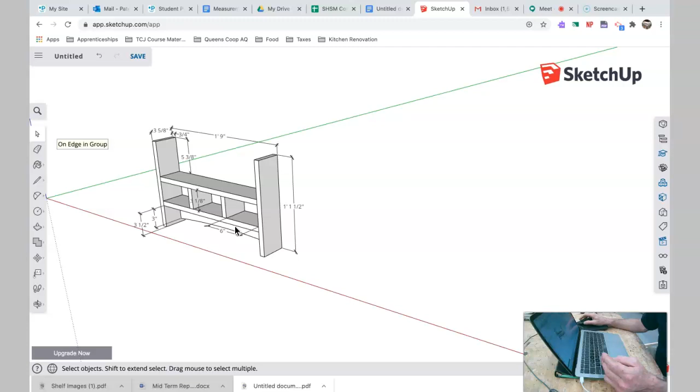Okay, everyone. If you're watching this video, that means you've already done a couple of the basic things in SketchUp, and you know how to use some basic tools. The purpose of this video is to show you how to draw your project.

So here's my project. Just a very simple shelf, space for hooks down there, place for little cubbies for things, and a bookshelf up top. And I have dimensions. So this is a version of the project, but this is what you're going to hand in.

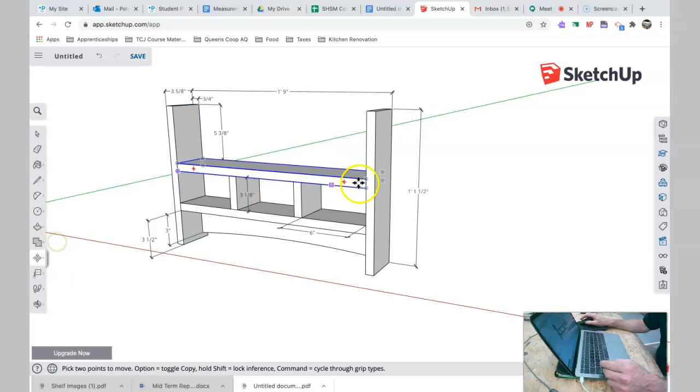You're going to take a screenshot of it in its final form like this, but you're also going to take a screenshot of it with everything pulled apart, where you take the pieces and pull them apart. You can get rid of the dimensions when you do that, to show that you've grouped everything properly.

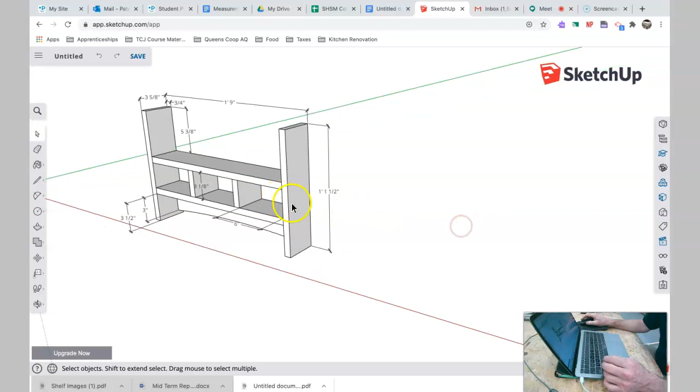Okay, so I'm going to copy this off to the right, draw it over in this space here, using some of the techniques I've shown you. The first thing is I'm going to draw these two sides here. Now let's zoom in and have a look at the dimensions.

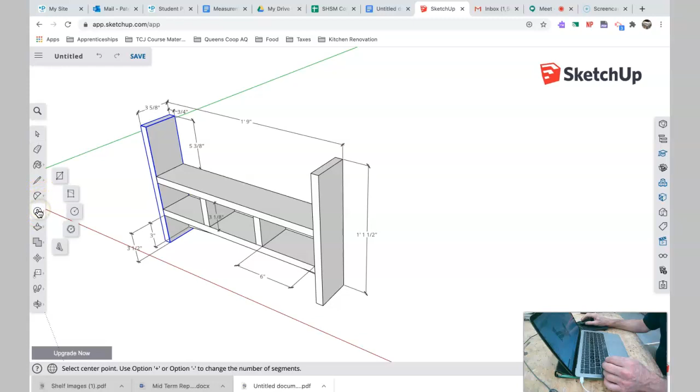So this piece here is 3 5/8 wide and 3/4 thick. I'm going to draw just that two-dimensional shape, 3 5/8 by 3/4, by going over here and choosing a square or rectangle tool, and I'm going to draw that.

So here's how you draw it. You click once to begin the drawing, drag it out, and then don't click again. You're going to look in the lower right of the screen. See all these numbers down here? Watch those numbers, because I'm going to do some typing now.

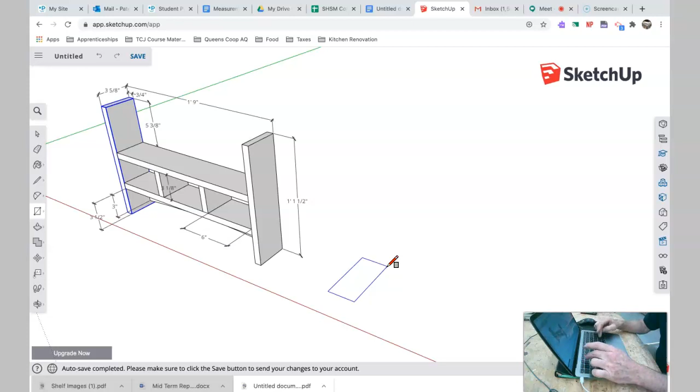So it's 3 5/8 by 3/4. I'm going to type 3/4, and put a comma, and then I'm going to put 3 5/8 — so 3, then a space, then 5/8, okay?

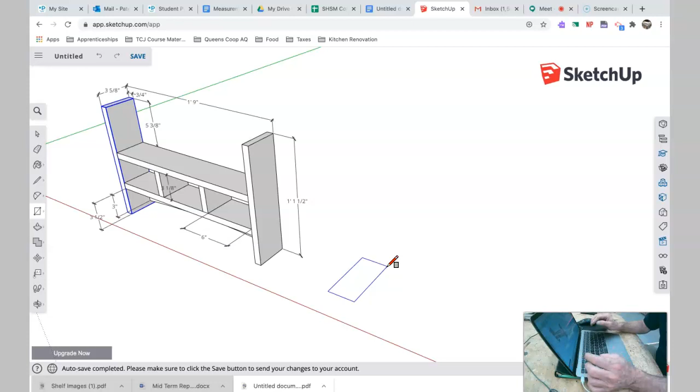Now SketchUp knows that I'm talking about inches. If I don't indicate anything, if I don't put the foot symbol or anything, it knows I mean inches. So you see what I just did? 3/4, comma, 3, space, 5/8. I hit enter, and there it is. That's the shape of that.

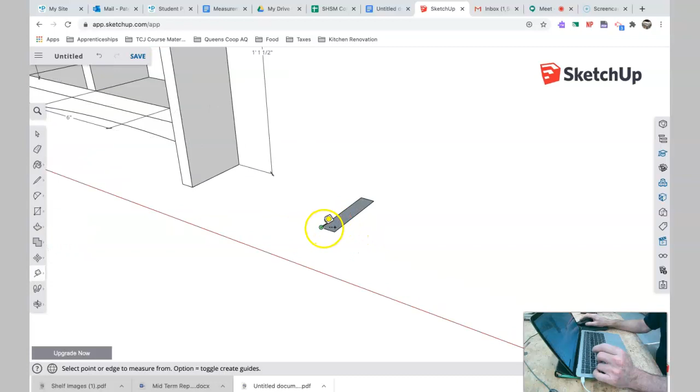And if I want to check that, I can get my tape measure — you can always use your tape measure to measure anything. Click once, then go to the end. That's 3 5/8. Hit the escape key. You can use escape to get out of any function or anything you're doing.

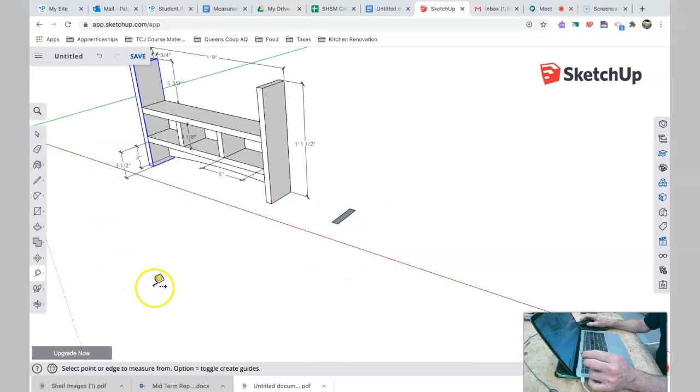And that's 3/4. So I hit escape, and now I'm going to raise that up. How high is this project? These pieces are 1 foot 1.5, which is the same thing as 13.5. So I'm going to push-pull.

Here's the push-pull tool — you see what I just grabbed it over there? Grab the push-pull tool, I click once, and I raise it up. Now again, don't click a second time. What you're going to do is type the dimensions in.

So 13.5 — 13, and I could put a fraction, a space, then 1/2 like that. Are you watching the numbers in the lower right of the screen? I could put 13 1/2, but instead I'm just going to work in decimals, since you can do either 0.5. Hit enter, and now that piece is 13.5.

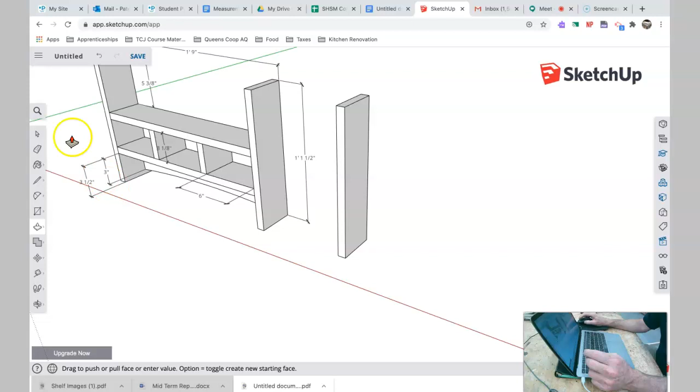So I'm done drawing that side piece — nothing else to do to it. If you want to put curves in it you could do that at this point, but I'm done. So I'm going to take the pointer and triple click — 1, 2, 3. Notice what that does: it selects everything on that object. Triple click, then I right click and make it a group.

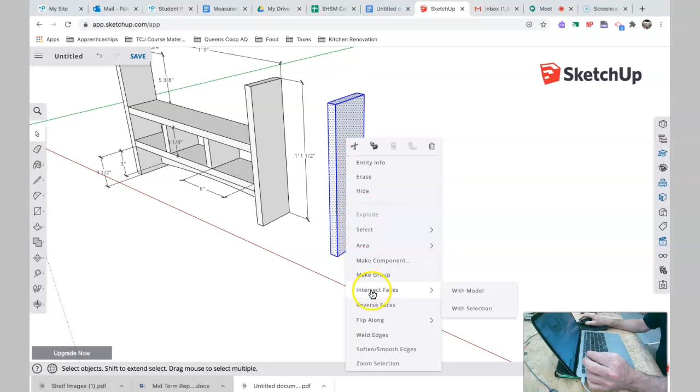Okay, so triple click, make it, and then right click, make it a group. Now I want to draw the second side. This is the first side, I'm going to do the second side. Now, how do I do that? I could come over here and draw it, but I've already got one here.

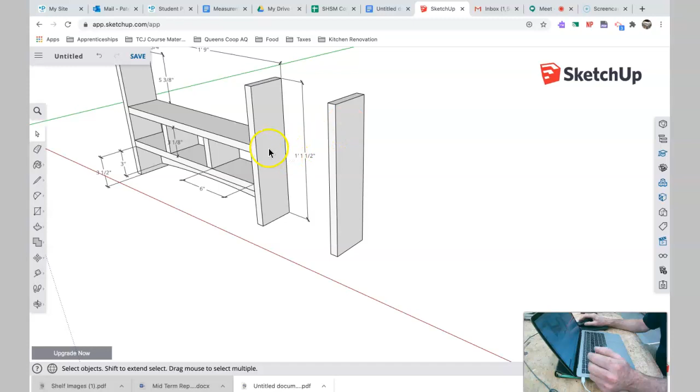It's identical, so I'm just going to copy this one over. We need to know how far, so I'm going to scroll in here. It's 1 foot 9, okay, 1 foot 9, which is 21 inches. And that's from the outside of the shelf to outside, from the outside of the left side to the outside of the right side.

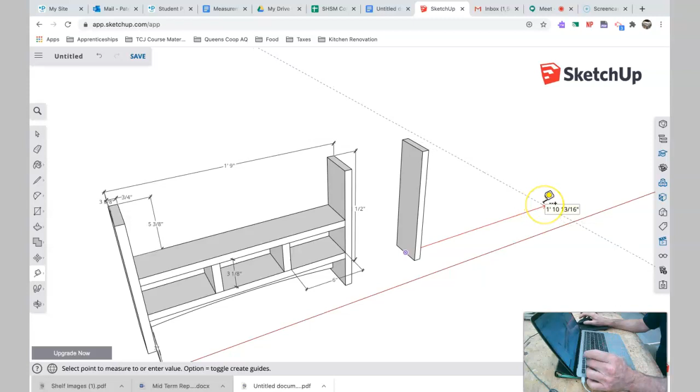So I'm going to mark that off first, the 21 inches, by taking a tape measure. Get the tape measure tool down here, okay, so here's the outside. I'm going to click once and start dragging, but don't click a second time, okay? You type in, watch the lower right of the screen where the numbers are. I type in 21, and SketchUp knows it's inches, and then I hit return or enter. Okay, now that's how far it's going to go.

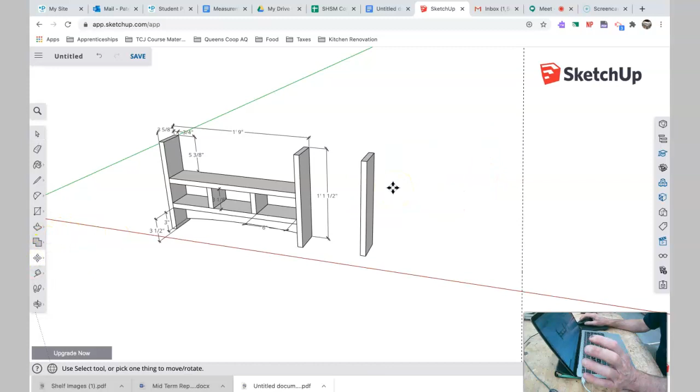Now I have to copy it. So it's a group, so because it's a group, I can take it and move it anywhere. I'm going to hit the escape key there. Okay, but I want to move and copy it at the same time. So I'm going to take the move tool, okay, and go down here.

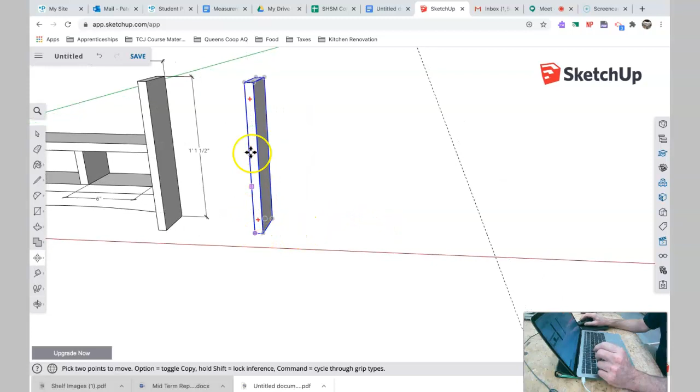Now, where am I going to grab it? That's the big question. It's important whenever you move something, or move and copy, you have to grab it in the right place. Okay, if I just grab it anywhere, like this, and then start moving it, and on a Mac I hit the Option key to copy it. If you're on a PC, you hit the Control key. So I'm going to hit the Option key now.

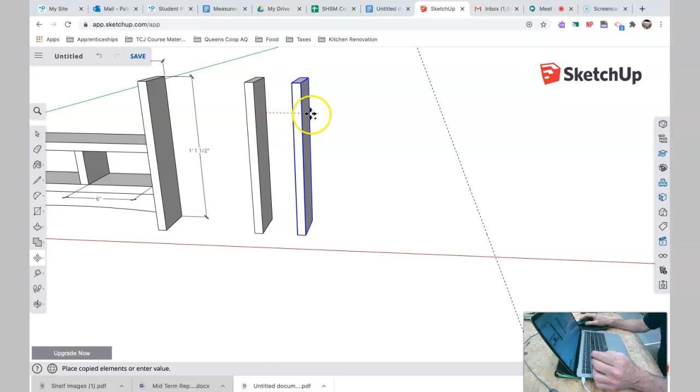Watch what happens. Option. Oh, there we go, it copied. Okay, if you're on a PC, you don't have an Option key, so you hit Control. I don't know if you have an Option key, to be honest, but you hit Control. Okay, and that's it. But here's my point: if I'm just grabbing it anywhere and moving and copying it, it's hard to place it on that line. Okay, see the dotted line? It's really hard to do that.

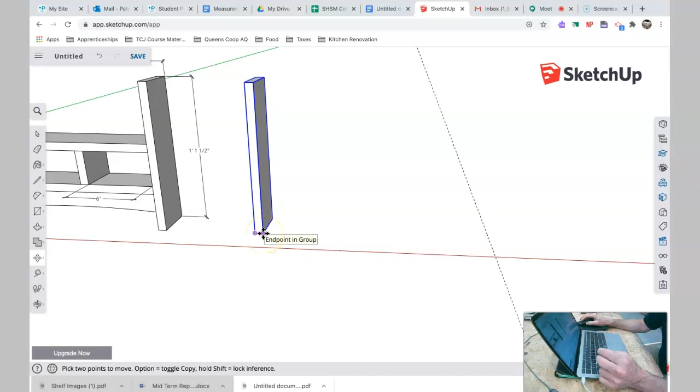So I'm going to hit the Escape key. All right, now I'm back to where I started. Here's what I want you to do instead: grab it from the corner, or from wherever makes sense, to land on that line. Okay, so I'm going to grab it in the lower right corner here, right there. I'm going to zoom in here. You see that? I'm going to grab it right there and start to move it.

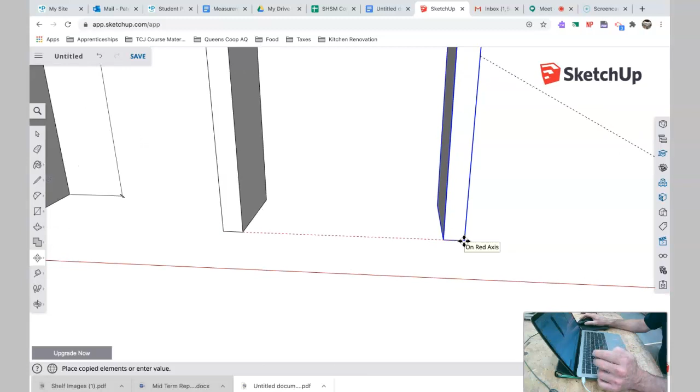And as I move it, as I said before, on a Mac I'm going to hit the Option key. If you're on a PC, then you hit the Control key to copy. So I'm moving it, don't click again. I'm going to hit the Option key. There, okay. And now I'm going to move over here and bring it over here and put it right on that line. Notice I'm following the red axis.

Okay, you see the dotted line is red. If I go off that red axis, it's going to be crooked. So keep on that red axis. Move, move, move, and you see how easy it is to place it on that line now? So that's perfect, and then I click like that, so I click to release. Get my pointer over here.

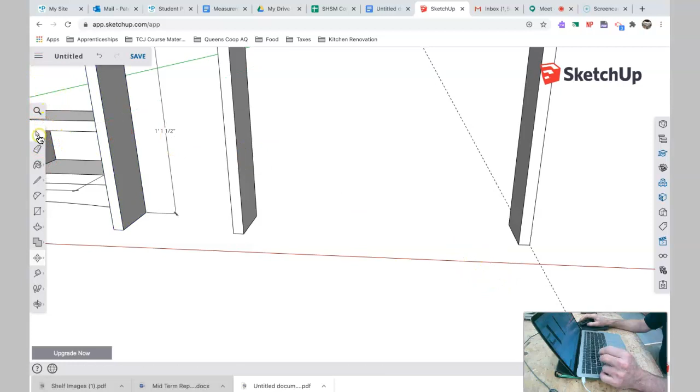Okay, and now what am I going to do? I'm going to do the shelves. So how do I do these shelves? I come down here, let's look at the dimensions. From the top down is 5 3/8. From the bottom up is 3 1/2. Okay, so let's mark those out with a tape measure.

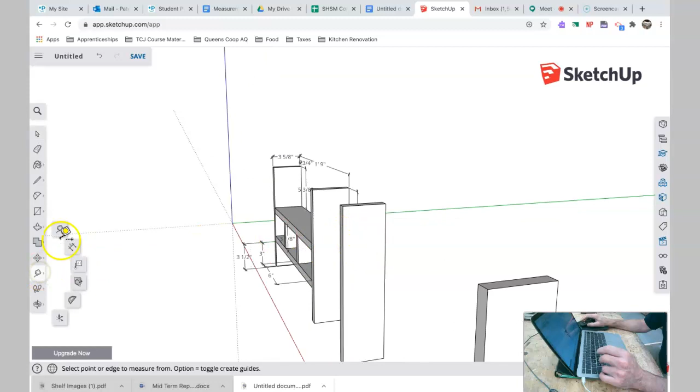I'm going to come in here, grab the tape measure tool, and from the top I'm going to bring it down. So don't click a second time. You're going to do this with the dimensions, so watch the lower right of the screen. I type 5 space 3/8. Okay, enter. And that gives me that line right there.

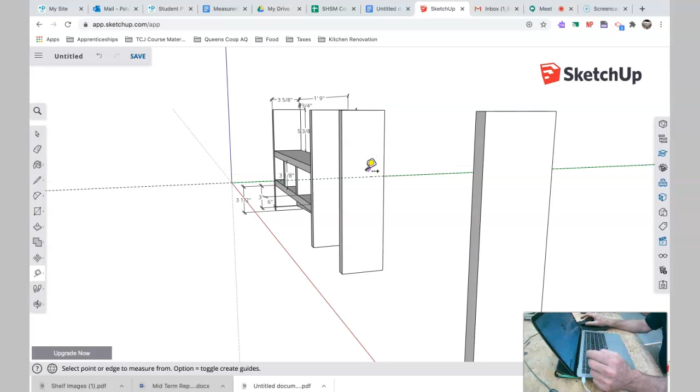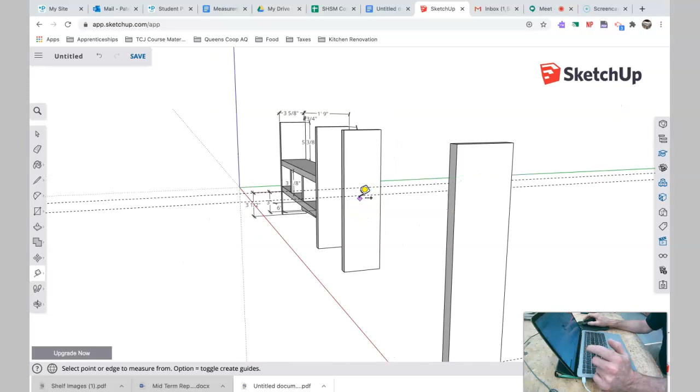Okay, now I need the thickness of this. So this shelf is 3/4 of an inch thick. So I'm going to do a second line here. I start to drag it out, and then I type 3/4, return or enter. And that gives me the size of that shelf. And so now I can do the same thing at the bottom. The bottom one was 3 1/2 inches up.

I'm going to click and climb that up 3.5. I could have typed the fraction, but I decided to do the decimal. Return or enter. That's the bottom of the shelf.

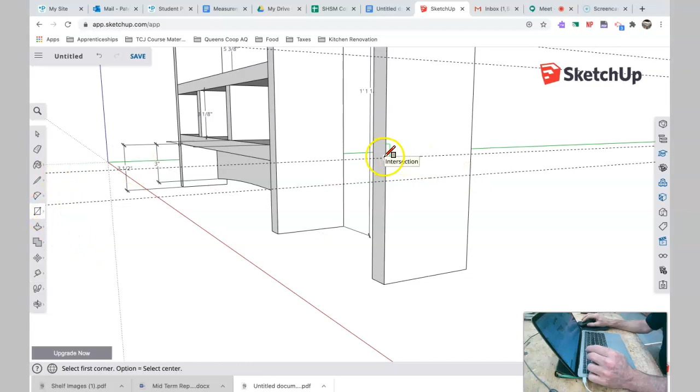Then I'm going to click once, bring it up 3/4, return. Then I'll take the rectangle tool, click once, click twice for that. And here, click once, click twice, and now we grab the push-pull tool like this, and we're going to take both of those over.

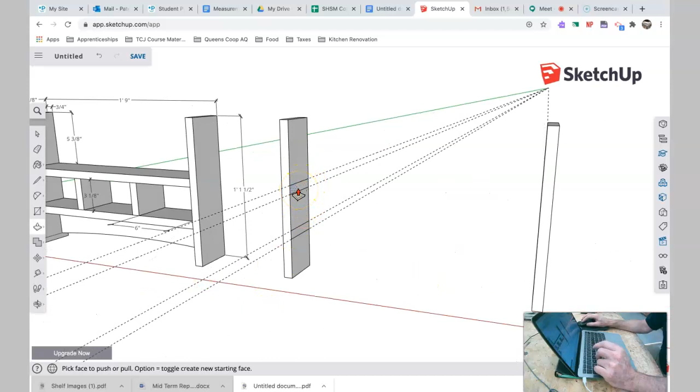So watch this. When you push-pull stuff, you click once and you drag it. All you have to do is line up the cursor with the thing you're trying to align with. I bring this over, and all I really have to do is place it along that edge.

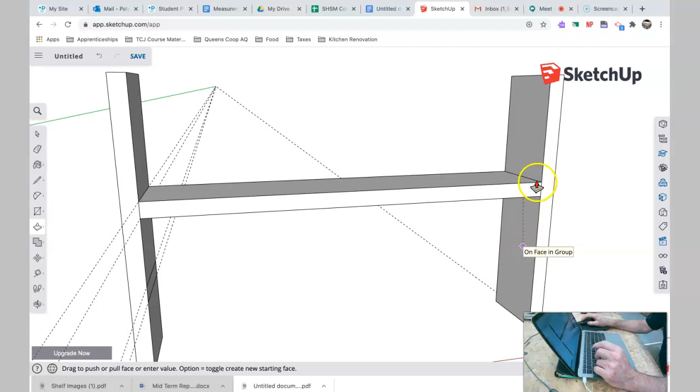I can place it on that face anywhere, or on that edge. But don't pull it all the way through - that's wrong. Just go on the edge or the face like that, then click a second time.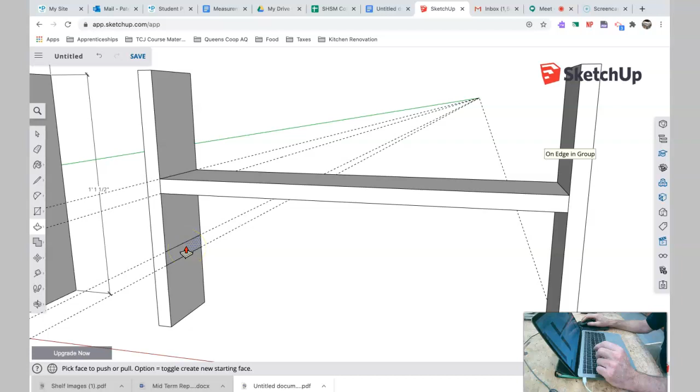To do this second one, it's the exact same size. To be honest, I could have drawn one and then copied it down, but watch this - I want to stretch this out. This is the exact same as the last one.

So I'm just going to bring it over and place it on that face, just like that. Or I touched the edge, but anyway, so those two are done.

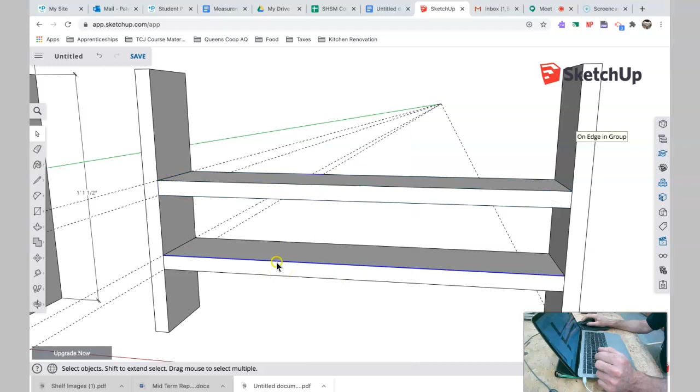So now I can group them. Create a group - 1, 2, 3, just a triple click, and then right click, make a group. Same thing here - 1, 2, 3, make a group.

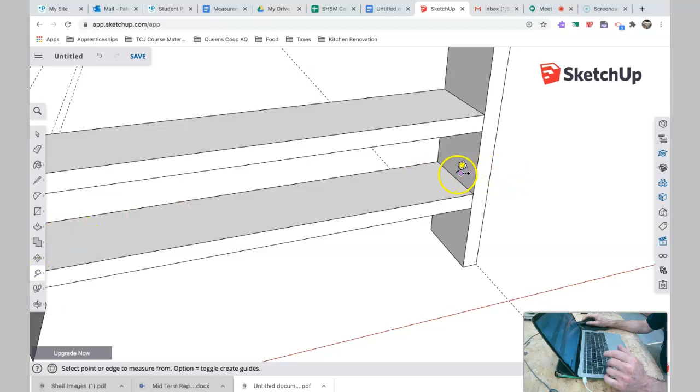Now these dividers - those are 6 inches in. So I'm going to come in here and create with my tape measure tool. I'm going to come over 6 inches. I type 6, enter, like that.

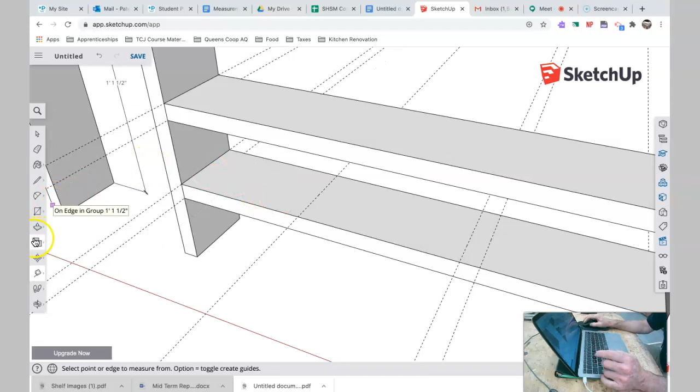And it's 3/4 thick, so 3/4, enter, like that. And over here, all I really need is the 6 inches, and I'll show you why. So 6, return. And now I'm going to create a rectangle here, like this.

I'm going to pull it up, like that. I just have to go to that edge - that's all I have to do. And then I'm going to make it a group. To make this a group, triple click 1, 2, 3, right click, make a group.

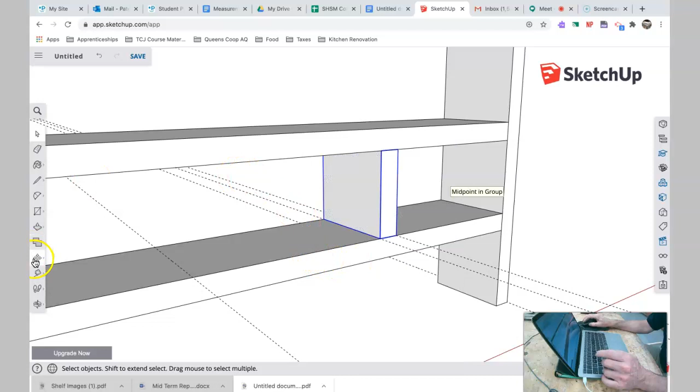And now I'm going to move and copy this at the same time. So I grab it there, and I start to move it. As I move it, because I'm on a Mac, I hit the Option key. Option copies it - if you're on a PC, you hit the Control key. I bring this over and place it right on that line, like that. That creates my 3 cubbies.

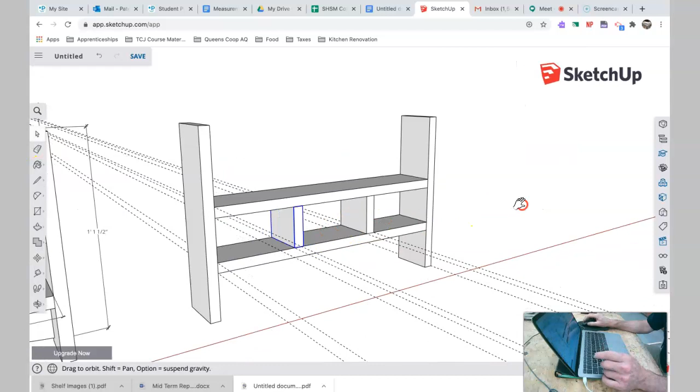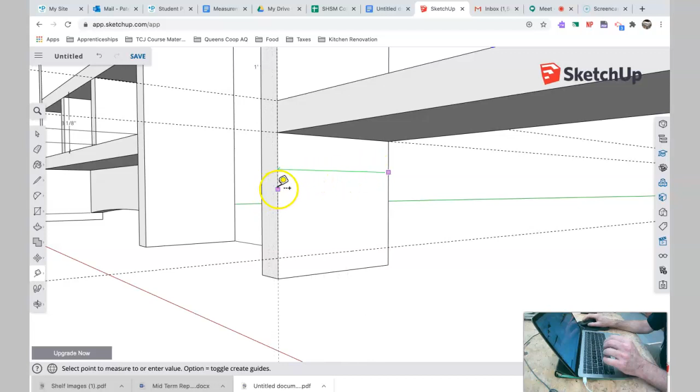Now all I have to do is go underneath here and create this back piece with a curve. I'm going to crawl underneath here, use the tape measure tool. I think it's a half inch up from the bottom, so I'm going to come up a half inch, and it's 3/4 thick. So I'm going to come over here 3/4 of an inch.

There we go, 3/4, like that. Rectangle tool, okay, like that, and then I pull that across. So I'm just going to zoom out here. I'm going to rotate around.

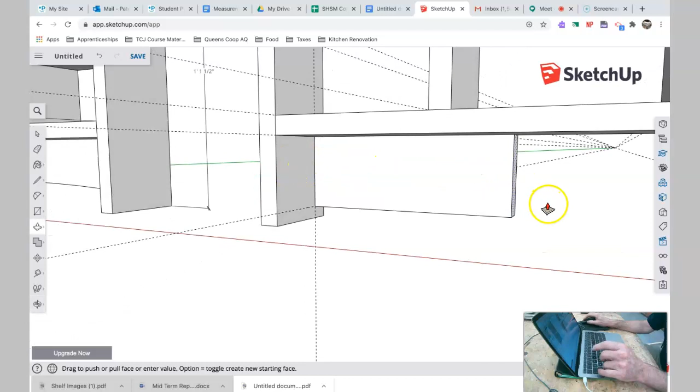So I'm going to start pulling, and I'm going to rotate as I pull - you can do that. Bring this over, place it on the face, like that. So that's where it's going to go. And click, and I'm done.

And now I just need a curve. Curves are kind of cool, they're fun to work with. So to draw a curve here, let me back out. Let's get rid of some of these lines - they're starting to confuse me. So I'm going to get rid of these lines. How am I going to do that?

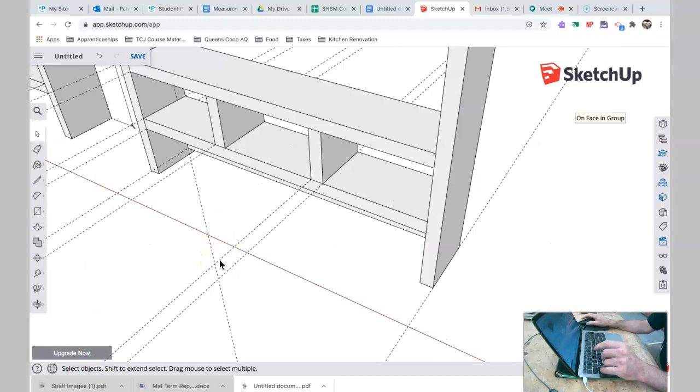I'm going to start in the lower right and draw a box like that, and then delete. That's a quick way of highlighting anything on your drawing. If you want to highlight a whole bunch of things all at once, you start in the lower right and draw a box around whatever you want to highlight, like that. So that's the whole thing, and I could move that whole thing if I wanted.

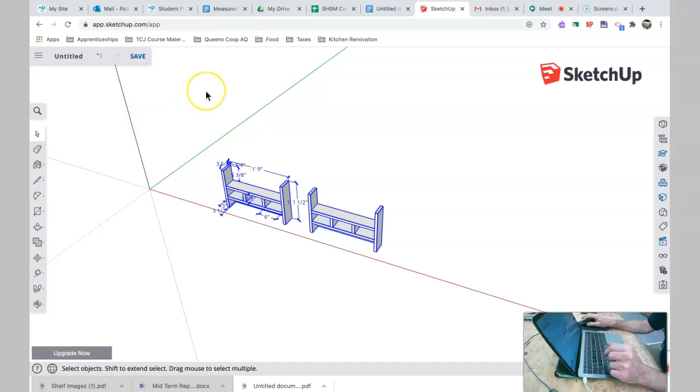Whatever, I'm going to hit the Escape key to get out of this. Go back here, get the pointer, click anywhere on the drawing, and that gets rid of my highlights.

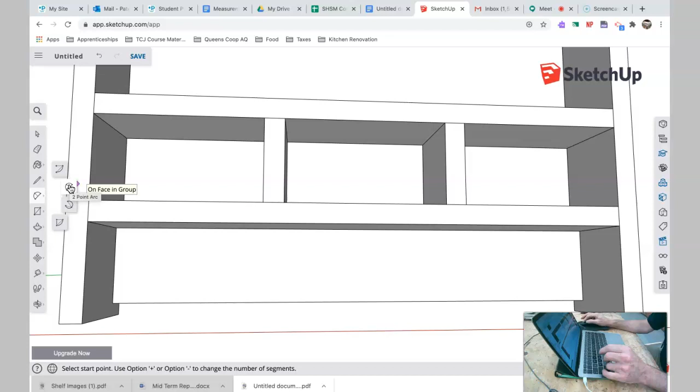Okay, let's crawl underneath here and draw a curve. The curve tool I'm going to use is up here, called a 2-point arc. I click on that tool, now I can draw an arc. I'll start down here, click once, bring it down here, click twice, and then raise it up. I don't like too much of a curve, or that kind of curve either. I just like a very gentle, shallow curve like that. Click.

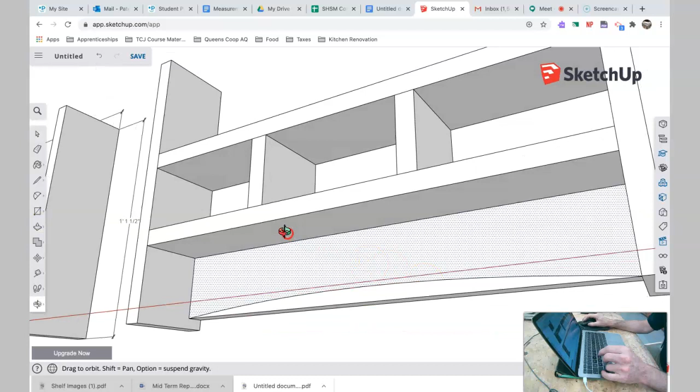Okay, now push pull. I click once, push it through, click twice, and I'm done. So that's my project, a copy of the first one.

Now what you do is put dimensions on it. Dimensions are down here by the tape measure, that's the dimensioning tool right there, and you just start dimensioning your project like that.

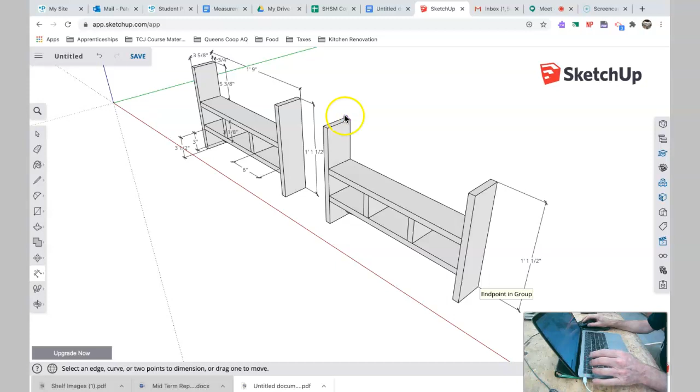Drag it out, and remember the dimensions for this. You have to include all dimensions needed to build this, all necessary dimensions to build it. So you just go around your drawing like that, and it ends up looking like this. You see all the dimensions, those are all the dimensions necessary to build the project, I hope.

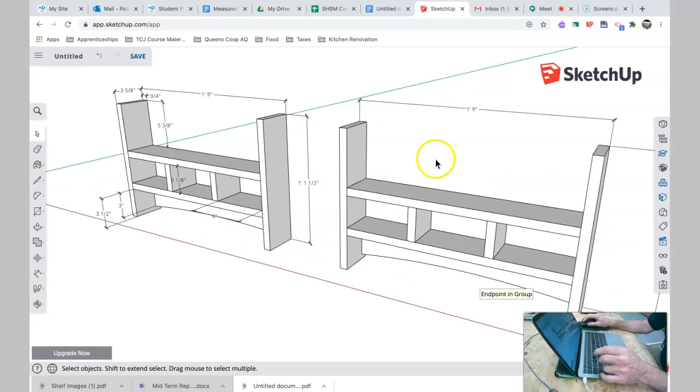So that you could hand this plan to somebody who does this for a living, or to somebody to build, and they shouldn't have too many questions because you've given them all the information.

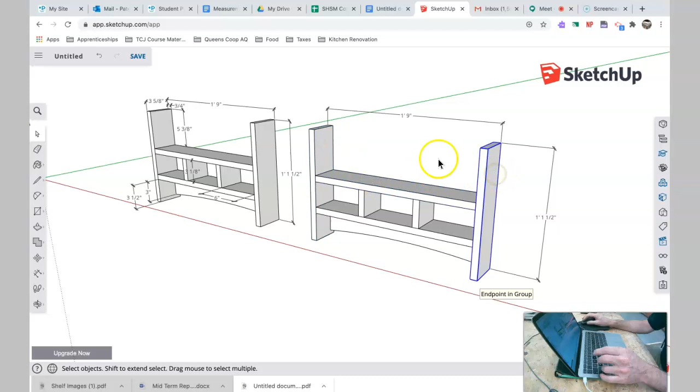And if you notice, basically if I click on any of these parts, I know it's grouped, because if I click once on it, it highlights blue. That means it's grouped. If you want to make changes to any of these pieces, like putting a curve on something.

Let's look at this end piece here. Then you just double click on it to open the group, open it and draw on it to change it. So you click twice like that, and that opens it, and now you can make changes.

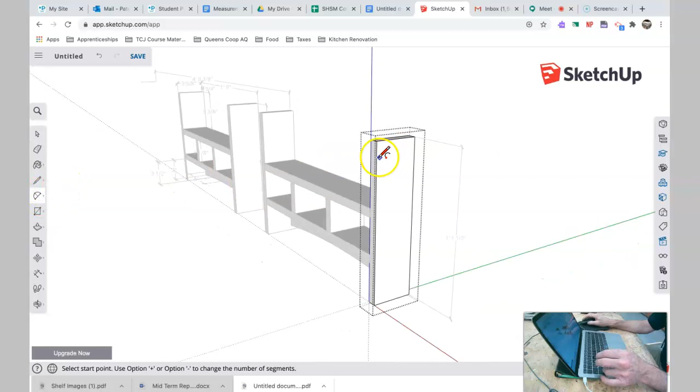Let's say I want to curve this, do a curve around here. Then I make a curve like that. Did you see how that works? I'll do that again. I click once here, then click twice up here where it says tangent to edge.

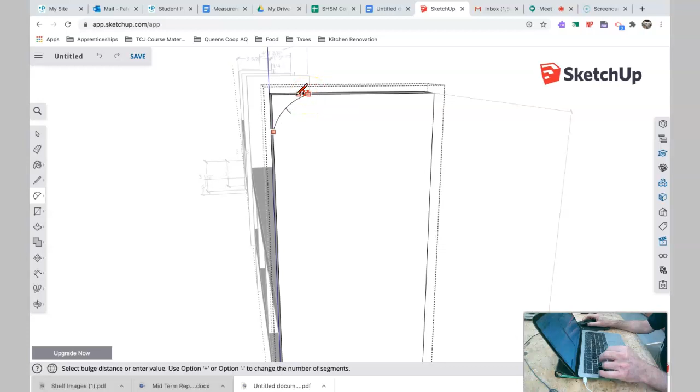I still have to click a third time. I drag it along that edge, right in there, until it turns pink and says tangent to edge, and then I click a third time. So that's 1, 2, 3 clicks.

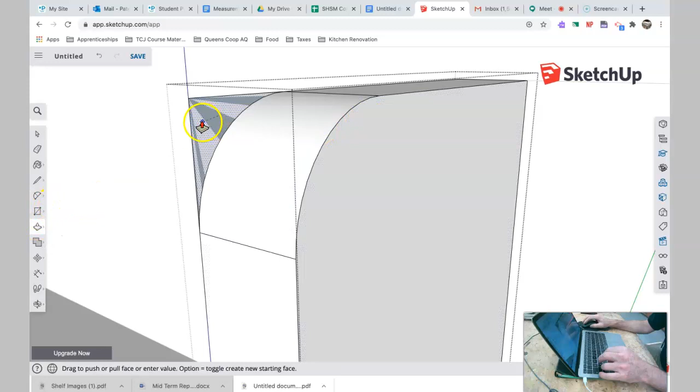Then I can push pull, click once, bring it through like that, okay? Let me back out here. Watch this, it always leaves these unsightly lines here, so let's get rid of those. Now I have to make sure that I'm in that group.

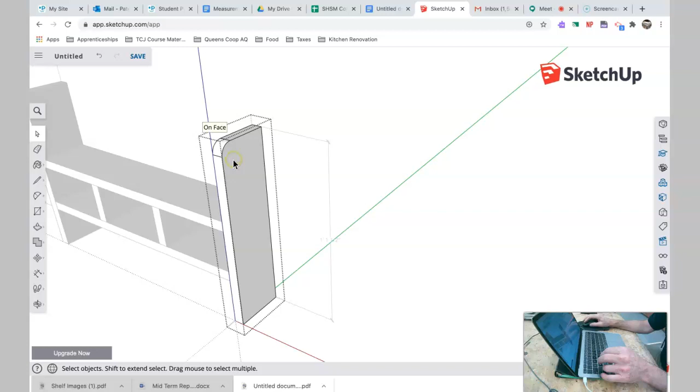So I have to open that group like that. Now I'm in the drawing for that group, and now I hit the erase tool. If I just use the erase tool, watch what happens, if I just try to erase that, it gets rid of that whole top. So that's not good, I'm going to hit Control, I'm going to hit Undo.

So here's what you do to get rid of that line but leave everything intact: hold the Shift key down, push it, and hit it with the eraser. Interesting, let me try that again. Let me open that up, and use the erase tool.

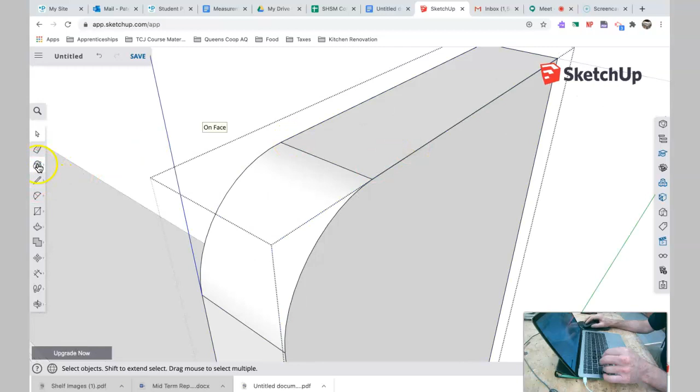For some reason this is not working for me this morning. No, it's not, okay, for some reason it's not working. It should work, it's always worked for me, for you it should work. My computer's kind of upset this morning, don't know why. Let me try that one more time. Nope, okay, forget about it. But you can use that, this has never done this to me before, anyway. So that is the drawing, folks.